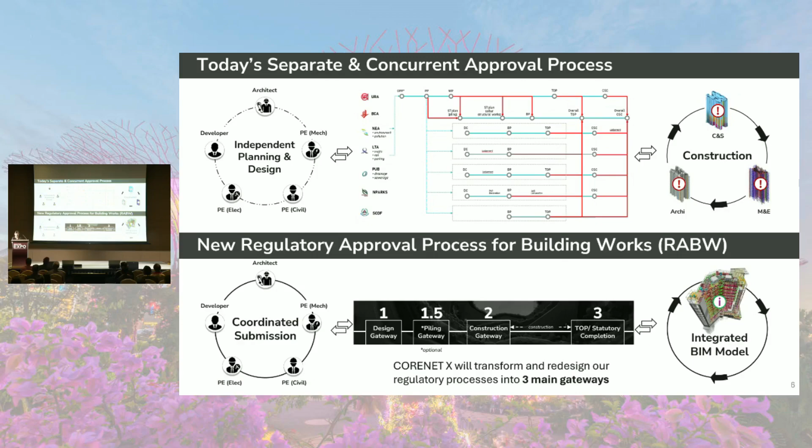To facilitate multidisciplinary submissions, BIM software, apps, and platforms are used extensively. This is not just BIM modeling in silo, but the use of BIM in a collaborative way to meet the different use cases of the creators and receivers of the data in the models.

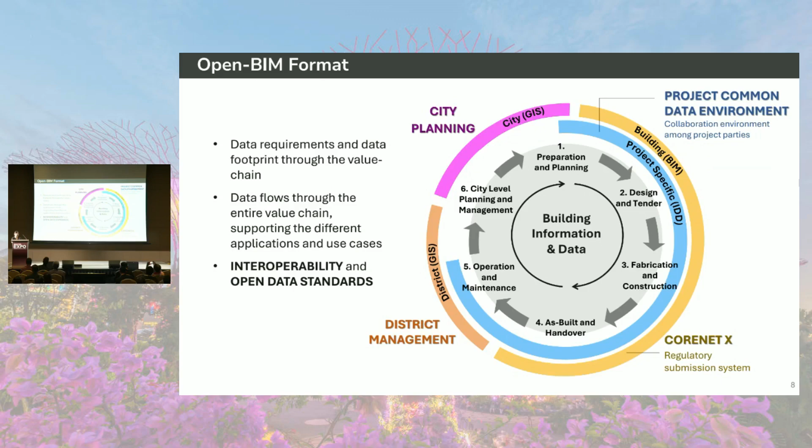The only way to do this is through interoperability and open data standards. CORENET kickstarts the exchange of data through collaborative BIM, and we hope that this effort will continue beyond regulatory use cases to benefit the rest of the building and asset lifecycle.

IFC was identified as the common data standard and file format to be submitted into CORENET, to be used in a back-end collaboration platform for our agencies to process submissions concurrently and holistically. We are also developing an automated model checker based on IFC and will channel data for various use cases in our future centralized data hub.

Some of you may be wondering about the IFC-SG in the middle. No worries, I will share more in the later slides.

As I round up the essentials of CORENET, I want to share the project team's journey when they make submissions. Firstly, they coordinate their design and review their models in native and openBIM formats. They then start creating draft submissions on the CORENET submission portal, which includes features to preview models.

When our automated model checker is ready in the future, they can also carry out pre-checks. When the project team is ready, they make official submission into CORENET. The files are transmitted from the submission portal to the backend collaboration platform, where agencies receive the files and start processing the submission together at the same time.

Within 20 working days, about a month, agencies will issue a consolidated response, including a BIM Collaboration Format or BCF file. This BCF file contains issues that agency officers have tagged to the BIM submission models. The project team will then review the agency's responses and revise their design for resubmission. We also encourage project teams to indicate their design revisions through the BCF format and include that in the resubmissions.

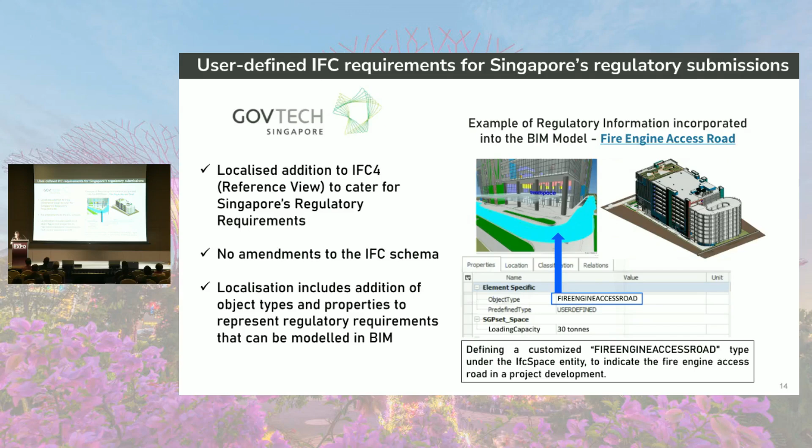We want to emphasize that IFC-SG is neither a modified copy nor a derivative version of the IFC standard. It is an informal term created to help industry professionals learn how our local regulatory requirements are to be embedded into BIM and exported for coordinated regulatory submissions.

We have also recently started uploading IFC-SG definitions into the buildingSMART Data Dictionary, where we call it the Singapore Data Dictionary. To be honest, we are still learning how to populate the definitions to better meet the bSDD requirements. We see potential in the bSDD to help industry practitioners create IDS to verify IFC-SG data quality for their submissions.

Lastly, I'll be sharing our initiatives to help industry practitioners transit to CORENET with emphasis on IFC-SG. There are 5 key steps to successfully submit an IFC-SG model. It starts with the CORENET Code of Practice, where the user identifies regulatory information for different types of submissions. Currently, the Code of Practice contains 48 IFC entities, 212 object types, and 334 properties from 7 regulatory agencies.

Oftentimes, modelers are experts in BIM software but may not have much idea of how and why regulatory data is mapped in different parts of the model. CORENET requires the party doing the modeling to communicate regularly with the party familiar with the regulatory requirements. This is a start to collaboration within the in-house team of each firm.

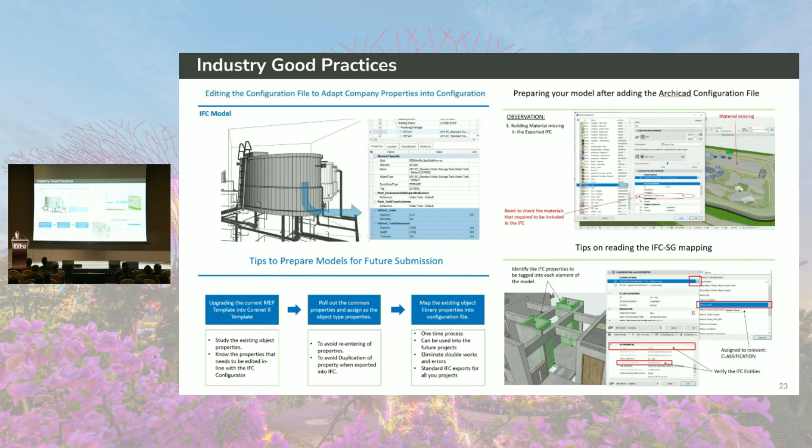Besides accurate data mapping, our CORENET X BIM Help Desk team also works closely with the BIM software vendors and advanced industry users to come up with good practices, such as geo-referencing multiple files from one or more BIM software.

As our industry becomes more knowledgeable in IFC, they have also started giving suggestions on improving IFC-SG itself for more efficient modeling, such as streamlining the naming of spaces across multiple regulatory agencies. For example, a shop could have different definitions to different agencies, because each agency checks the shop for different requirements. By standardizing the space names, industry does not need to have too many overlapping space components in their model submissions. We're also glad that our agencies are open-minded and slowly building up their IFC-SG knowledge, welcoming all these ways to improve the regulatory requirement representation in the IFC-SG standard.

This simplifies modeling requirements for regulatory compliance, enabling the project teams to focus more time and resources on actual design.

Last but not least, we have rolled out a variety of training courses, also with support from PSG funding, to help our industry with CORENET X onboarding.

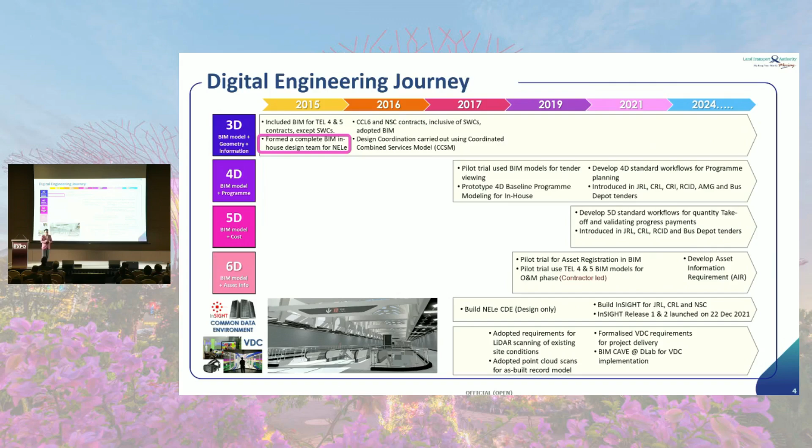These are basically the high-level information of how we progressed along the years in introducing BIM in our organization. But what's most important for this sharing about complexity to clarity is that we took the BIM in-house design for the Northeast Line extension, initiated in 2015. We did the concept design before that, but we only started really doing BIM in 2015. So that's where I'm going to go a bit deeper into the introduction.

The Northeast Line extension has a station called Punggol Coast Station, NE18, connected to the terminus of this Northeast Line. As you can see on the right, that's the complexity of that plot of land that leads us to the Punggol Digital District. It connects with GTC Retail Podium and the stations underground, and then you have SIT at the south of that map, and there's a bus interchange as well.

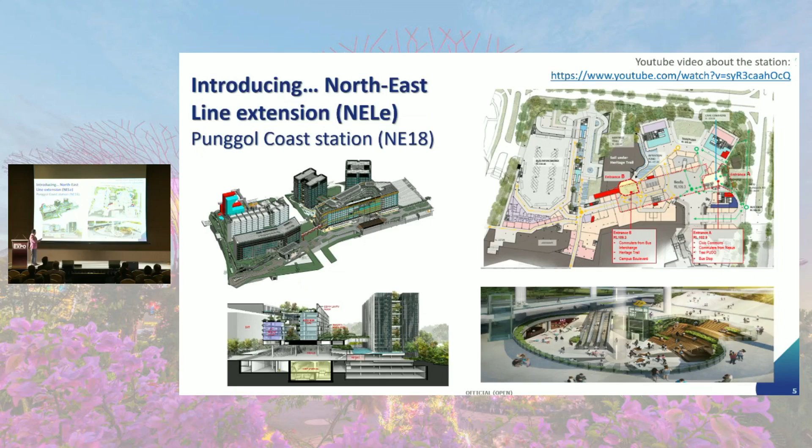There's also an entrance A and an entrance B. There are civic and public spaces for placemaking, where you can host public events, etc. This is the cross section of that entire district, and that's the artistic view of what it is now.

As I go through the next few slides, you'll understand a bit more of the complexity of this project, because above it is a huge building, with the stations underground beneath the whole structure. So we need to ensure it's properly enforced and properly designed, while keeping our design in mind. We went through a design thinking workshop to discuss how we want to present this new station as an LTA project.

I'm not an architect, so I will not attempt to sell the beautiful design of the station. But what you can see here is actually a very interesting layout, and I urge you all to go to the new station to have a look, to appreciate what we've done there.

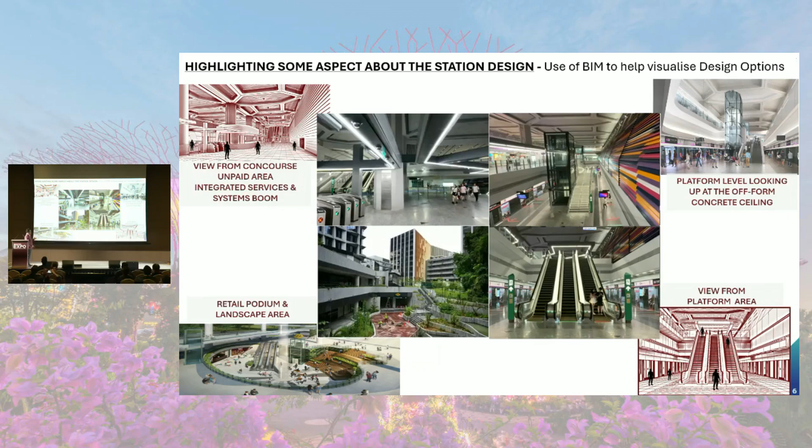In the next few slides, I'll just show you broadly the BIM design, the BIM model of the entire technology project site.

As you see, the station is actually below the GTC retail podium. Below that, SIT is on the south, and in front there are all the offices. The interchange is on this side of the PDD, Punggol Digital District, and it's actually a mega multi-use, mixed-use project, fully integrated with the station.

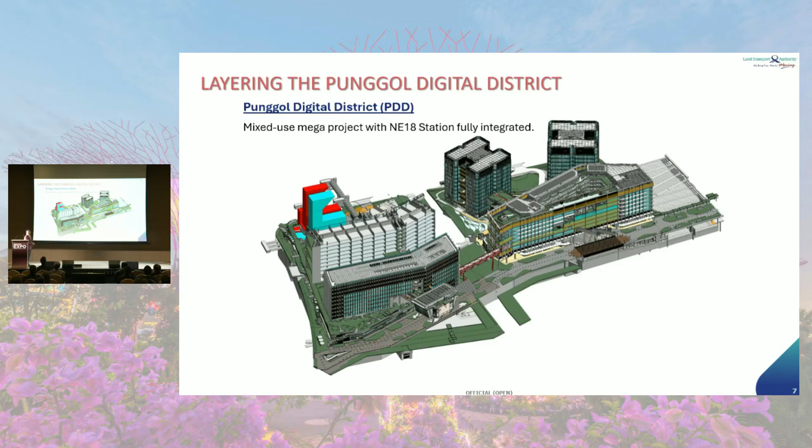This is basement level 1, where entrance A and entrance B have that community space for placemaking, and that's where the bus interchange is. Level 2 is like that.

But what I want to share more intimately about this is that because of this project, when my team was formed in 2019, we had to study what was actually not being done right in LTA to find the gaps in our digital engineering practice. It's anchored around the typical things we always discuss: people, process, and technology.

On the people's front, we understood that capability and competency was an issue. We had a consultant appointed for the project, but at the time we started, BIM to infrastructure was very early days for us, and it took us some time to really grasp it. Everybody was applying BIM in their own way, the contractor led in their own way, and the project management team had a different perspective. So to converge all this, there were a lot of capability and competency gaps we needed to bridge.

When it comes to process, I think you've heard also that BIM is not just software, but back in those days, software seemed to be something we were all being forced to adopt, as well as to accommodate the practice. That's what you have to figure out. Up and above that, 3D BIM back in the infrastructure sector was very new. We were very good at 2D, but when it comes to 3D, we tend to do 2D practice in BIM.

So we always joke about this is actually a 2D BIM project. It's not exactly following the pure form of 3D BIM and VDC.

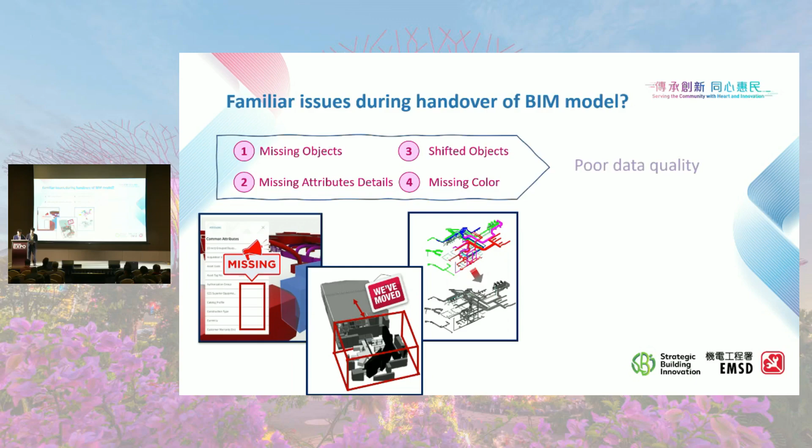Have you ever experienced receiving a handover BIM model with missing objects, missing attributes, missing colors, or shifted equipment? All this poor data quality makes it extremely hard for the maintenance party to carry out subsequent operations and maintenance, and hard to maintain throughout the entire building lifecycle.

But why do we care so much about data quality, or about the handover process? We, EMSD of the Hong Kong government, are one of the biggest maintenance agents in Hong Kong, with many years of experience overseeing more than 1 million E&M equipment and systems across over 8,000 government venues. Information on all this equipment is ultimately stored in our asset management portal. As you can imagine, data quality from the BIM model is crucial for us to carry out effective maintenance works in thousands of government venues.

So why openBIM? Contractors in different categories or disciplines often prefer their own BIM software, meaning an organization like us has to acquire various software to view and comment, which is costly and requires relevant knowledge in using different software. OpenBIM has an absolute advantage in solving this problem. If submissions are all in IFC format, we only require one software to handle the BIM models, saving time in acquiring different software operation techniques for our draftsmen and technical officers, and saving costs by not procuring so much software.

Most importantly, using the same standard enables seamless collaboration and interoperability, which greatly shortens the project lifecycle and facilitates the future development of the digital twin platform for the smart city in Hong Kong.

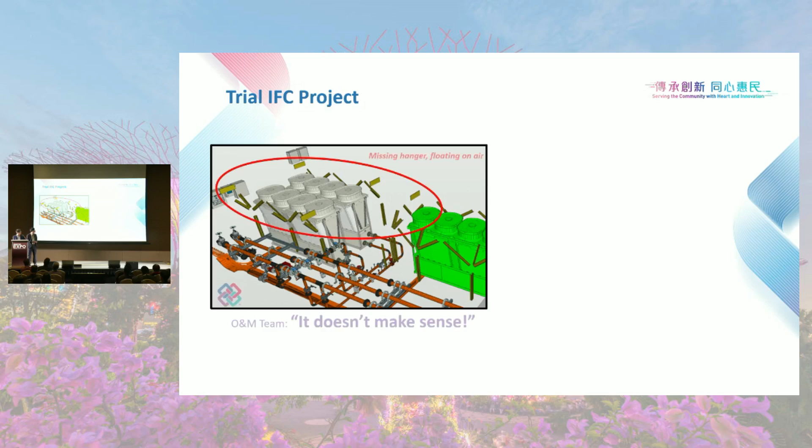So one of the most common issues we heard from the trade and the industry in Hong Kong is when they were converting the native to the IFC format, they often experience different levels of data loss, mainly including missing data, attributes, missing colors, or shifted objects.

And this has stopped them from adopting openBIM further. Even if they can manage to generate an IFC file with a complete set of objects, they still have to deal with the tedious process of identifying and rectifying different types of errors found in the model, mostly due to human input errors. Most of the time, these errors will only be discovered after handover, which causes huge impact on subsequent operations and maintenance. So what is even worse, this error data could hinder future system integrations for BIM, asset management, or digital twin purposes.

So with our years of experience in the E&M industry, we have developed highly customized requirements to facilitate the handover of equipment. As technology advances, new systems and new equipment are often introduced. And when new requirements arise, how can we effectively manage the new and existing requirements so that the contractors can be timely updated with the latest requirements?

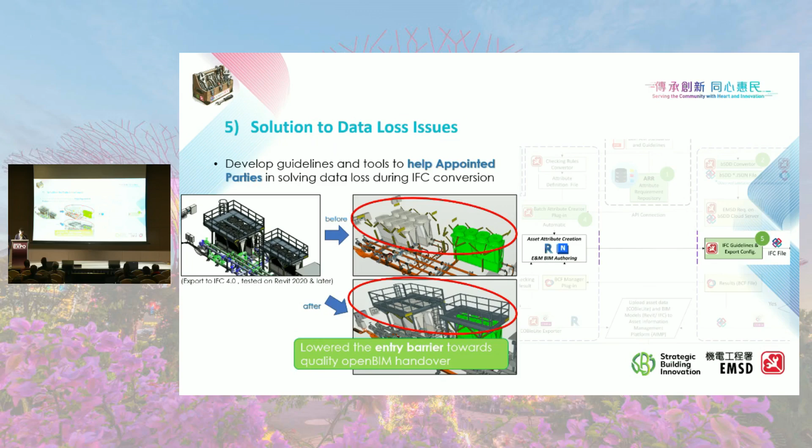Then we use the API connection provided by BSI and develop this Revit plugin within the existing Revit workflow. This plugin will tap onto the single source of truth on the cloud, the bSDD, and help the supply chain create attributes confidently and effectively. They can save tens of hours of time each time, and also have better QA and attribute consistency for these 300 plus asset types.

Still remember the flying equipment? Even if the project team is not using IFC for editing, we have developed an IFC conversion guide, which also includes the mapping file specific to our asset requirements, so that no matter which version of Revit you are using, they can still export IFC with confidence without data loss, missing objects or coordinates.

As you can see, the data is now coming back. Using the IDS schema, we are able to carry out these 4 types of attribute checking, which are important to us. Our IDS is directly linked to the bSDD, and thanks to the BSI community, an enhancement was done upon our request, and it can now support our complex validation requirements. With that, we have tried it out using the BIM model of our headquarters building, as you can see here, and validated using the market-available IDS checker.

The building consists of 15 IFC files and more than 37,000 assets. We have proven that rather than days, only less than half an hour is required to go through the complex checking and generate the outstanding issues in BCF for review and rectification before handover to the O&M team. Since IDS is a relatively new standard, we have tried not only one IDS checker, but 3 from different solutions, one from Finland, one from Italy, and one from the United States, so that a broader community can benefit from it.